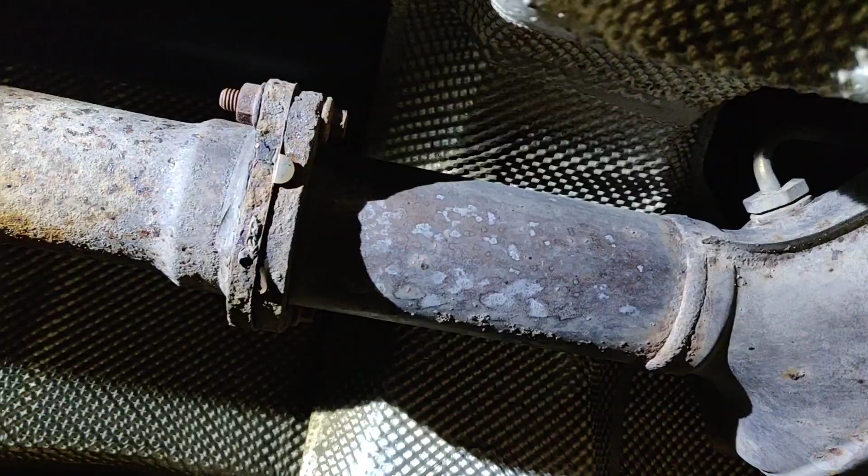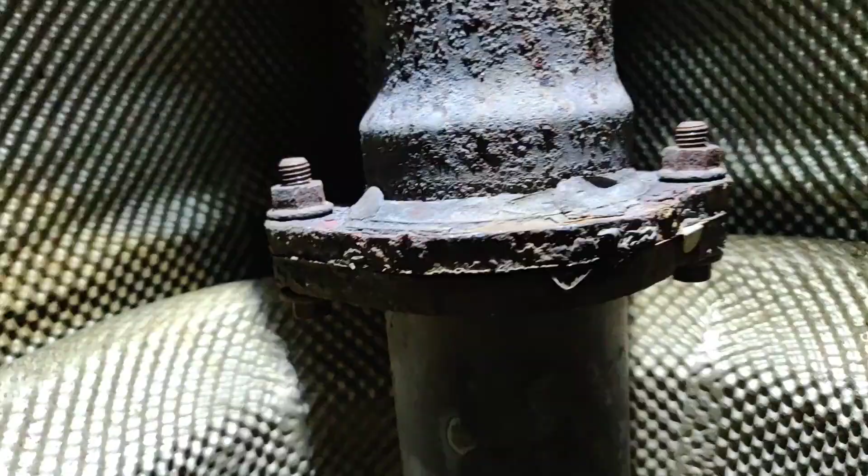So we already lifted the car. We can see the exhaust bolts are pretty nice - they've already been changed, swapped, and originally they are usually burned in. As you can see, there is a seal.

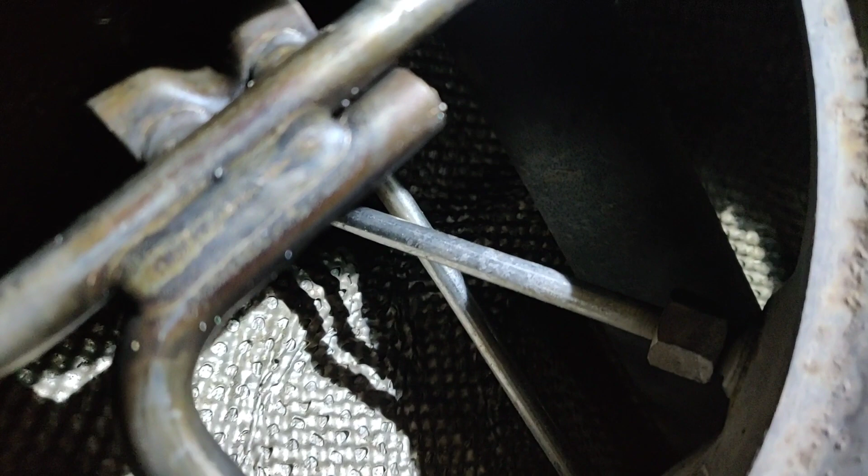So in here we have the location of the DPF filter. This is the pressure sensor on the backside, and somewhere over there we have a pressure sensor on the front side - look, this is it. So that's where the pressure sensor goes. There's two pipes going to the DPF differential pressure sensor, and then we have a temperature sensor as well, all located there.

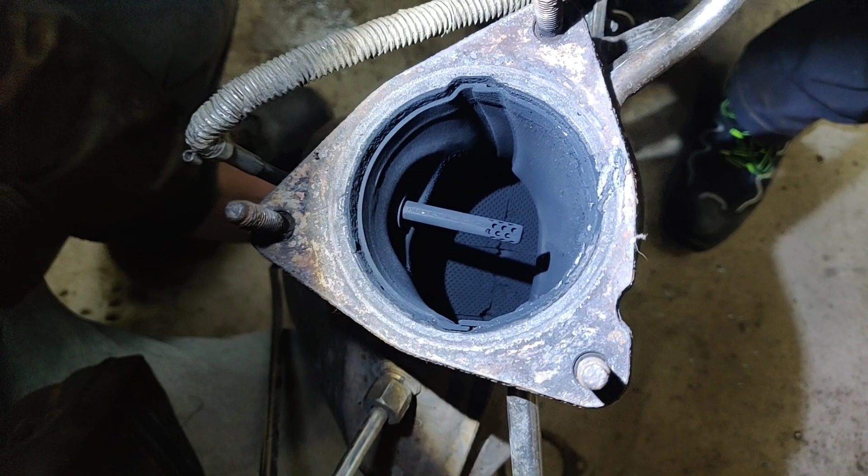So we took off the DPF filter, and the problem is with the car and the DPF filter. If you look closer, I can zoom in so you can see we still haven't opened anything, and there's such big damage to the DPF filter. That's why it's not possible to do any regeneration job, and that's the problem with this car. We can solve this problem pretty easily, and we do it right and correctly without any problems.

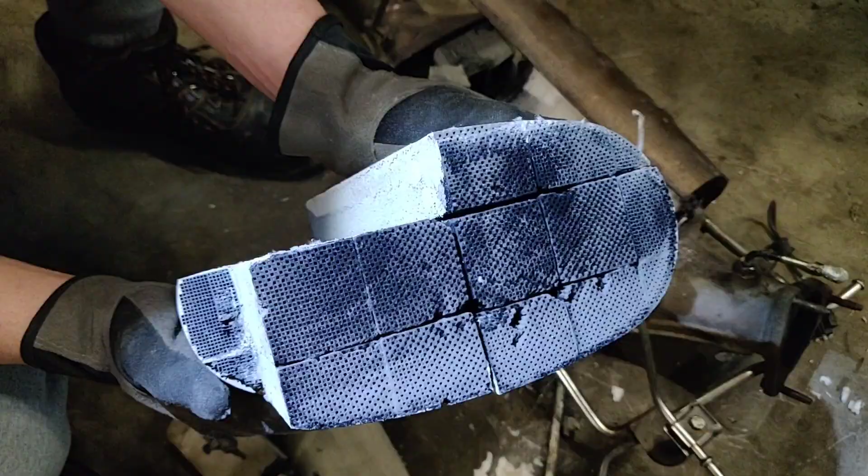So let's do it and let's start. We already took it out. As you can see what kind of damage it was here - it's definitely completely gone.

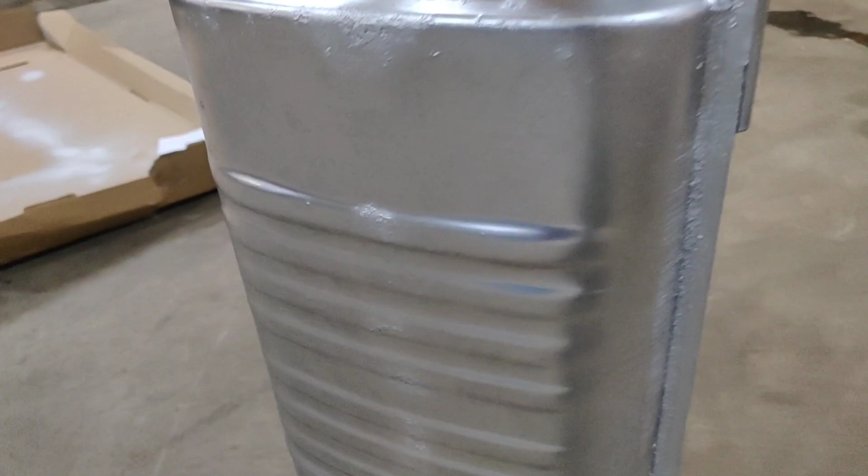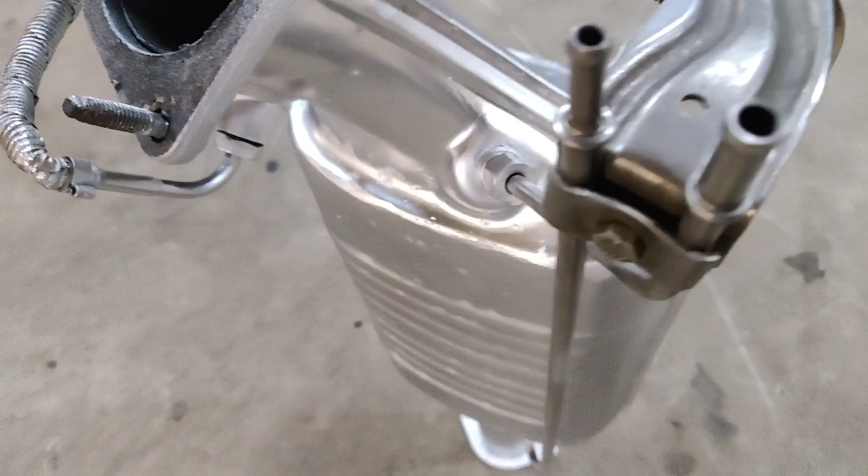So here we go, the DPF filter is completely restored, all refurbished. It looks brand new, definitely. All the way around is a zinc paint, which holds the high temperature and gives you a maximum burst of power. Perfect.

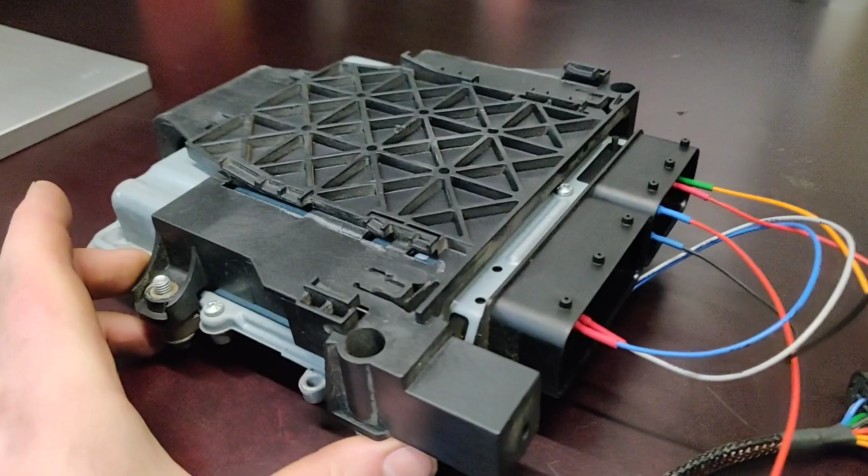So this is one of the ECUs which is actually completely locked from the factory, so it's not possible to read it just like that. So we need this - this is another connection way, which is GPT, and we're using basically bench mode. We tested it out, it's never been opened, so everything is cool.

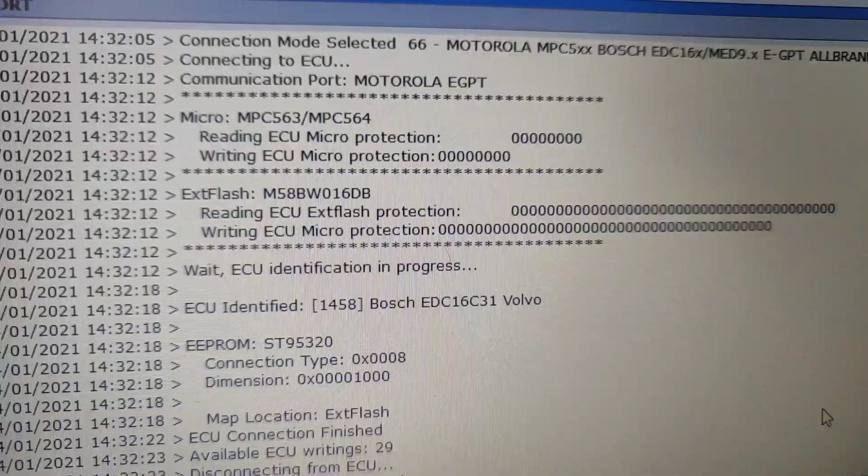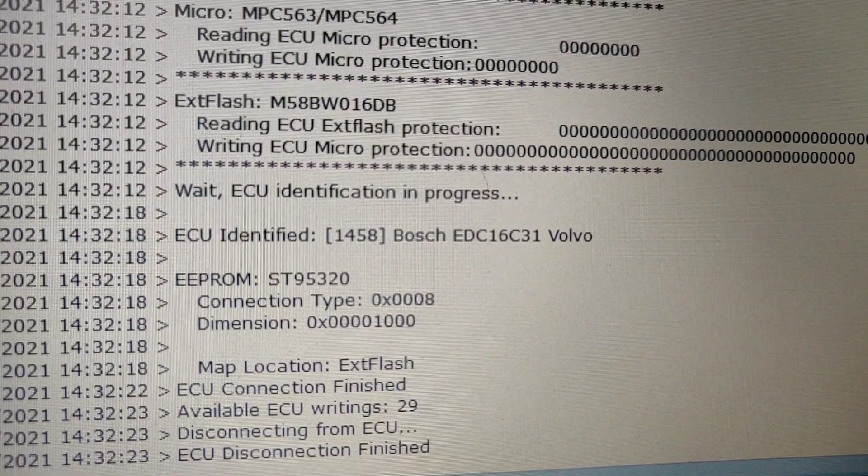We're all connected, and as you can see here, this is the EDC16C31, it's Volvo. It's micro protected, meaning the micro is fully protected. The map location is external flash, that's what we need, and the EEPROM system is ST95320. This allows us to completely clone the ECU, but what we need to do is just remap the ECU, so we need to use a kind of ECU tuning file, DTF only, to do the stuff.

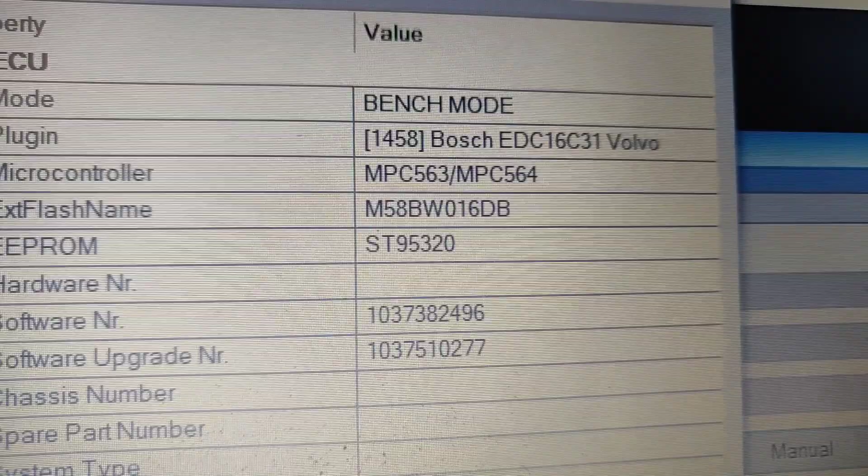Here you can see all the identification - this is where you can see its software number, software upgrade number, and EEPROM and external flash name.

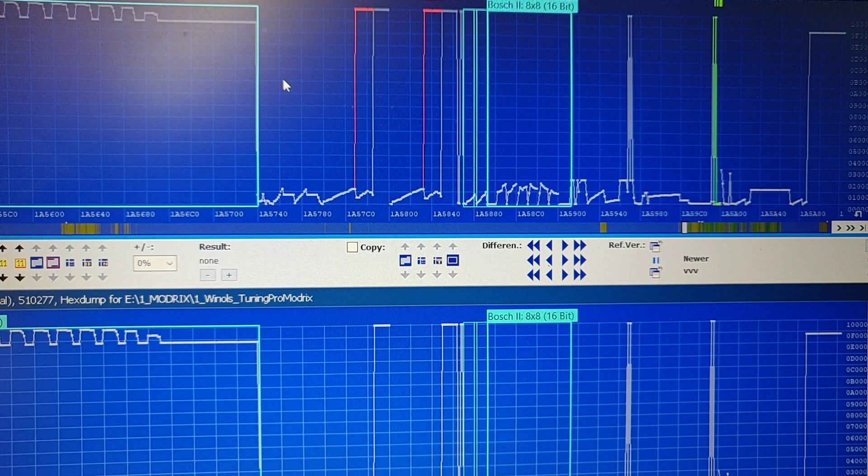Let's go on. It's very good when we can compare the file, because they're being locked software, so the ECU locked from the K-line reading. And if we compare, as you can see, the red lines mean there are already file modifications. That means EGR is completely modified, its map is completely off.

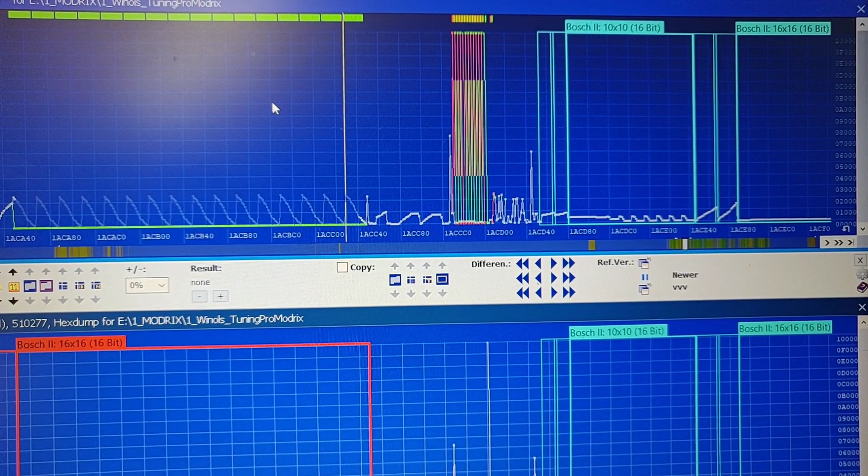This is the case where the EGR was reprogrammed, and the car owner actually did know about this. Yes, he did realize the EGR is off, because the DPF filter regeneration is not possible. That's because the DPF switch is the same, switched off, and yes, this is the problem. So in this case, there's no different way than to just keep reprogramming the software to the end and finish it and install it back in again.

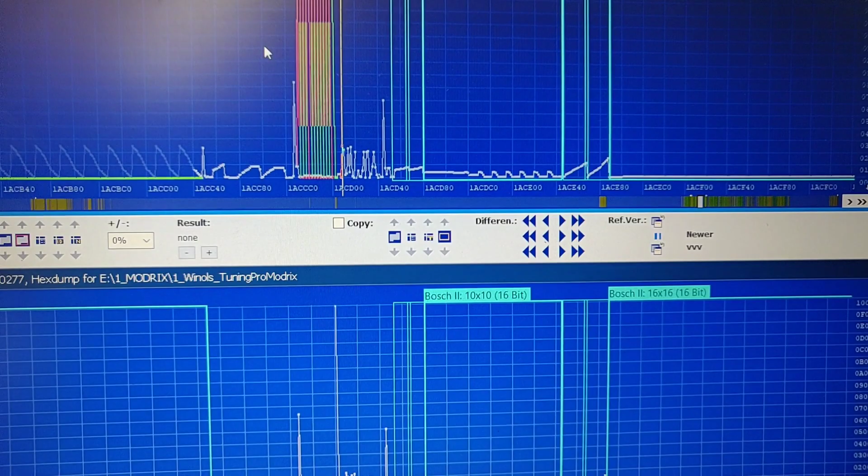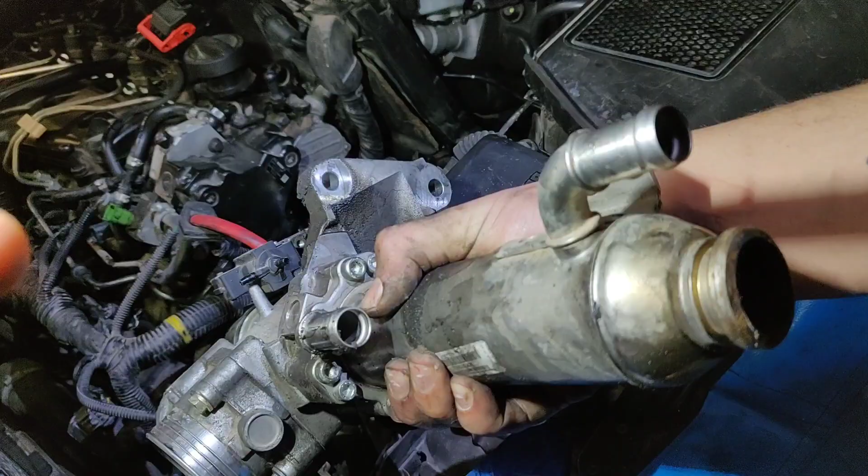So how to get the EGR out is pretty simple. You just unlock these two pipes, which are intake and output for the cooling of the EGR valve, and it's located on the front. Basically you need to remove the screws - 1, 2, and where is the 3rd screw? And that's it, just this. So it's nothing more, just 1, 2, 3 screws, and you pull it out. I think it's very simple, very easy.

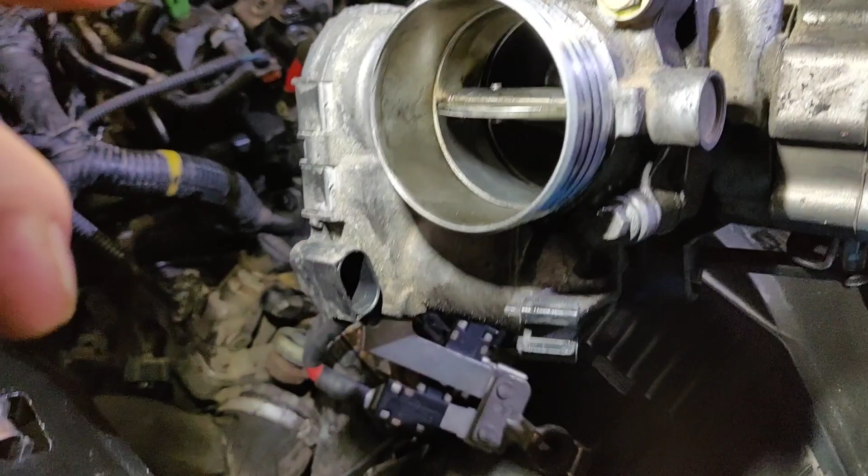And here you can see that somebody has already opened it up. As you can see, one bolt is completely different. You can see where the EGR valve actually is. As you can see, that's the one - that's the EGR electronic valve, which opens and closes when the smoke comes from this side through.

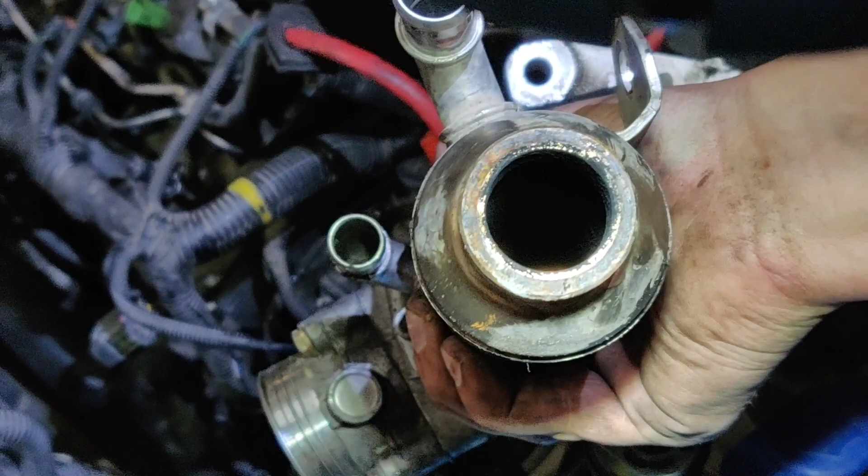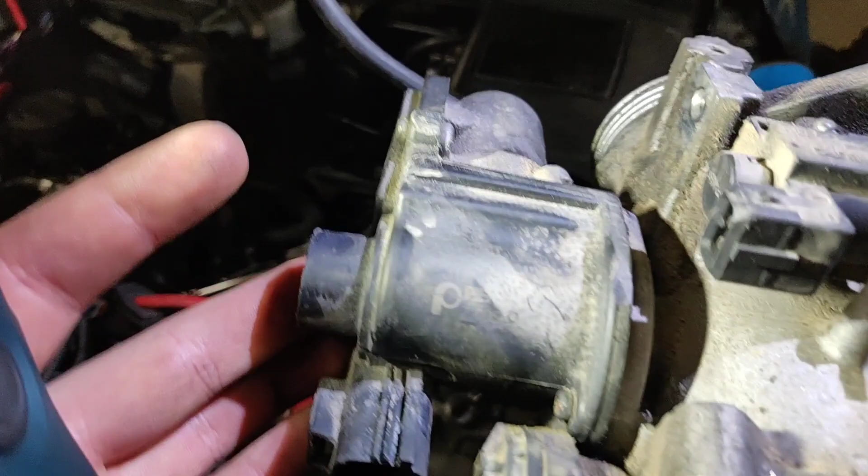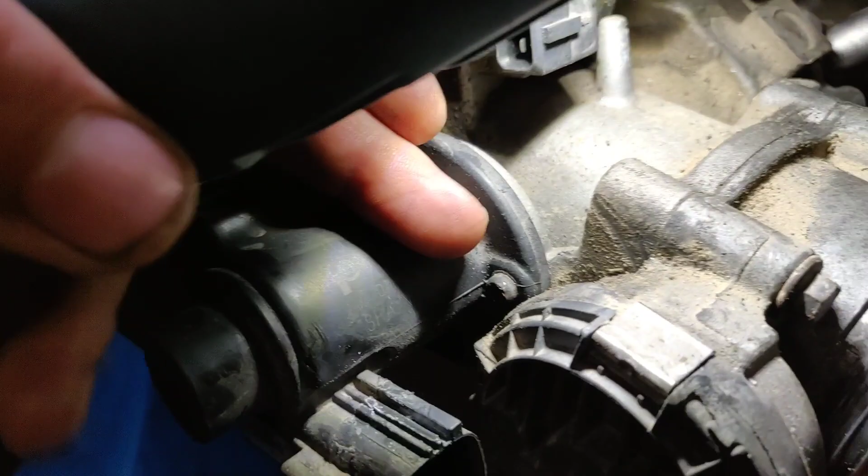So this is how it looks like. What you need to do, actually the best place to block it is just in here. Just screw all those screws around, block it in there, and it's done. Pretty easy. But even that is not too bad, because this is an electronic EGR valve, which works in an electronic way - it blocks when it moves with the motor. Here you can see the details of it. So that's very easy, I would say.

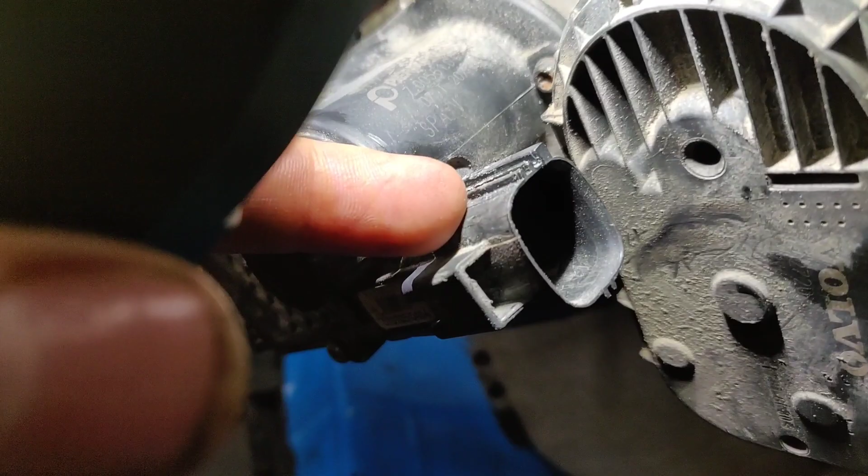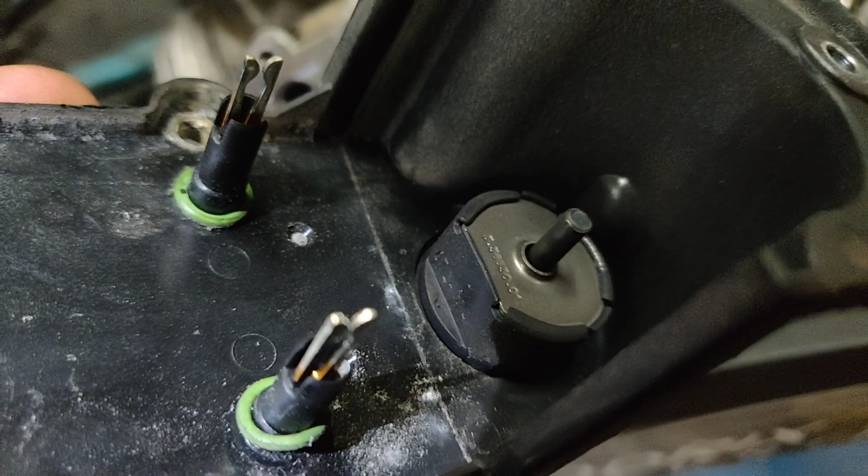And this one is being screwed out as well, and this one was glued as well. So this is how it does, this is how it looks like when you took it off. So this actually is - here you can see the position of it, the position sensor I reckon this is. So you just push it in, and depending how much you push, it recognizes how far the EGR is opened.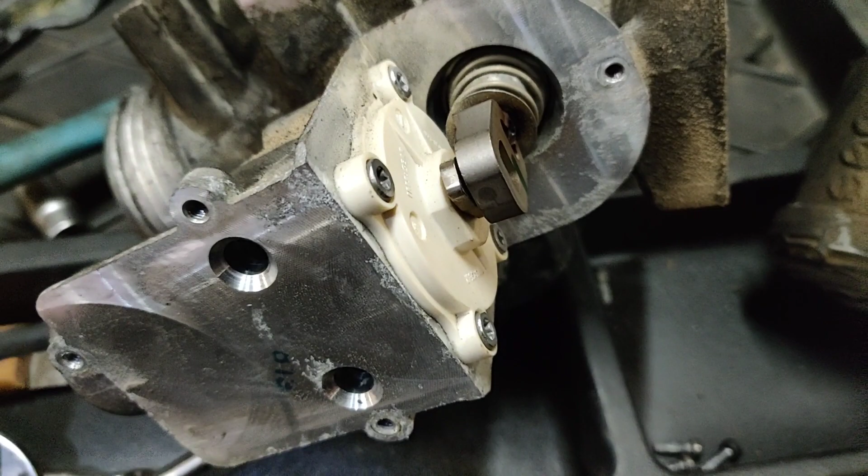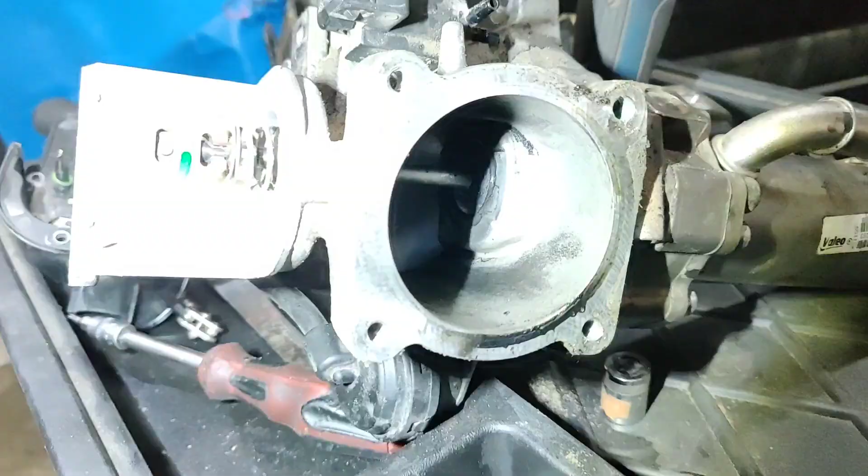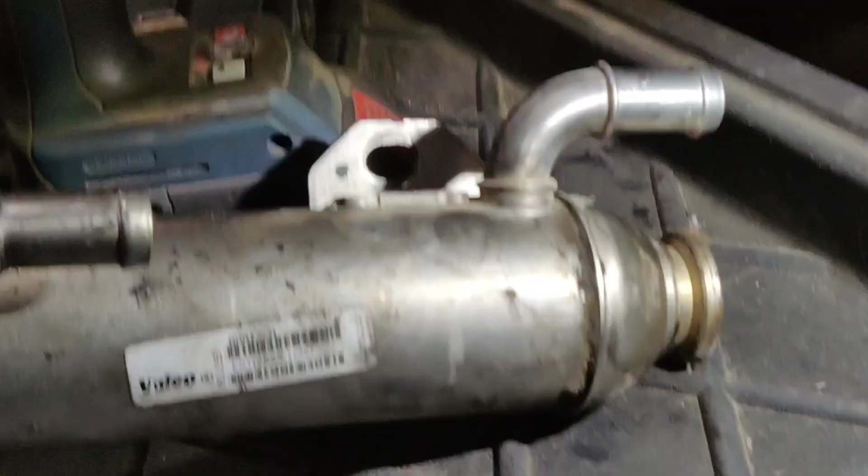And this is when you have plus and minus for the motor. The motor is located inside. Then how it looks like - push it down and we're gonna see how the EGR valve will open. That's how it is. You saw, it's opening up and closing down. Yes, correctly. And when it opens, the gases from the exhaust get inside the engine, and that's why this side and that side are usually full of dirt and clogged because of the EGR valve involved.

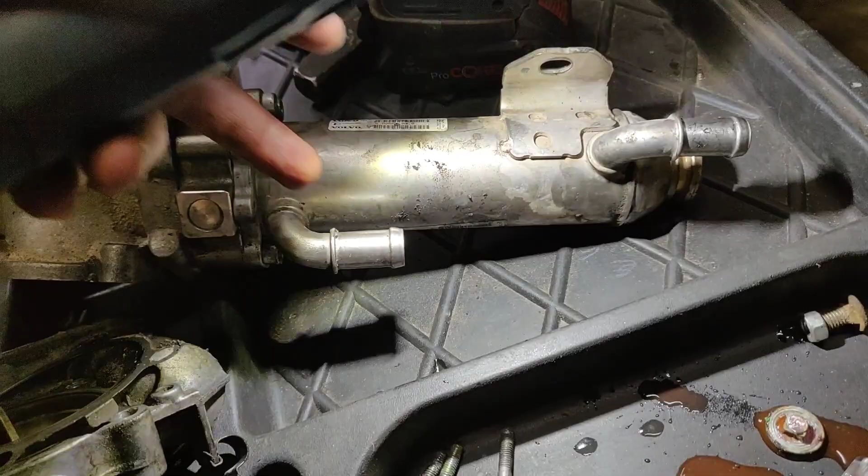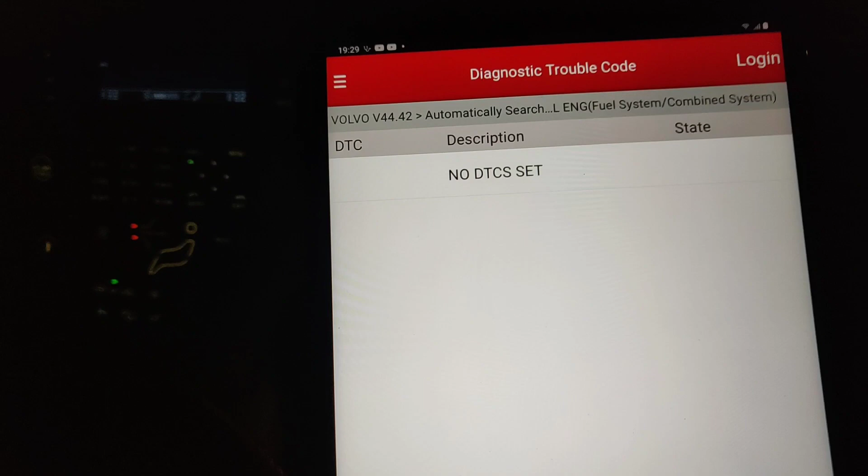So what you can do, of course, is delete it all the way around, take it all out, just connect these pipes on, and that could be a cool, nice thing. In this case we can connect everything back together and block it in here. So we are done. Going on the test drive, all good, all cool, no fault codes, no limp mode, everything worked correctly. So let's read the fault codes, and of course you have no DTC set, so that means everything is perfect.